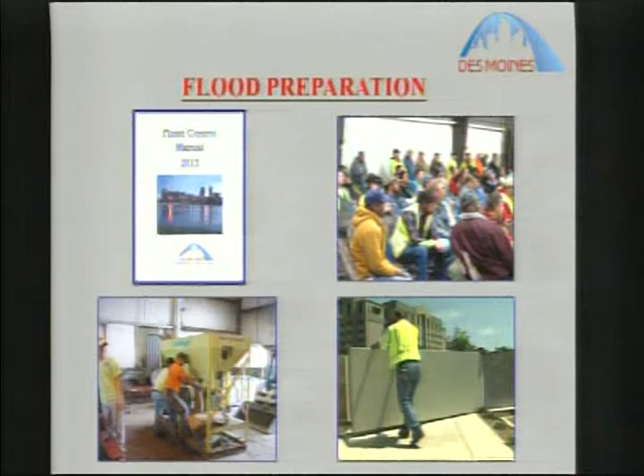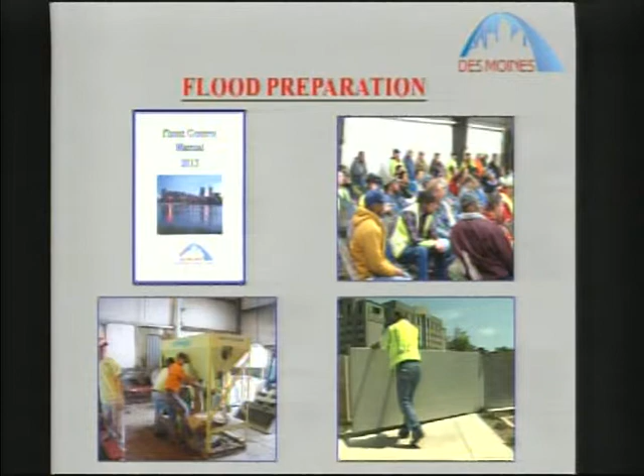In preparation for the flood season, we begin during the late winter months with preparing a 284-page flood manual. It tells us exactly how to button this city up step by step, inch by inch, in water levels on the rivers and streams. Then we meet with our employees, in the upper right-hand corner there, March 27th, to go over the details. In the bottom left-hand corner, we're preparing our supplies, filling sandbags, all the while exercising the facilities we have at swing gate there at City Hall.

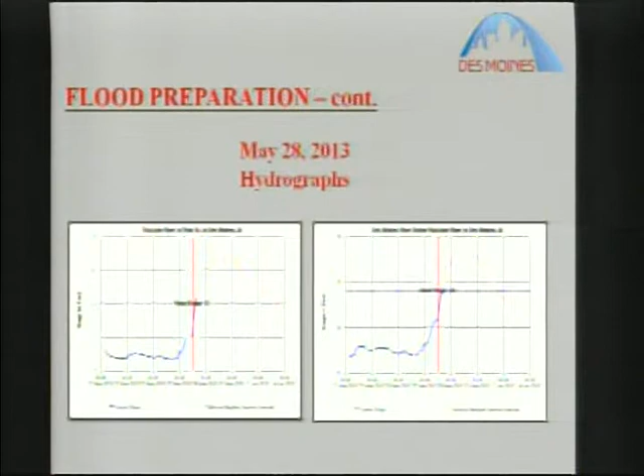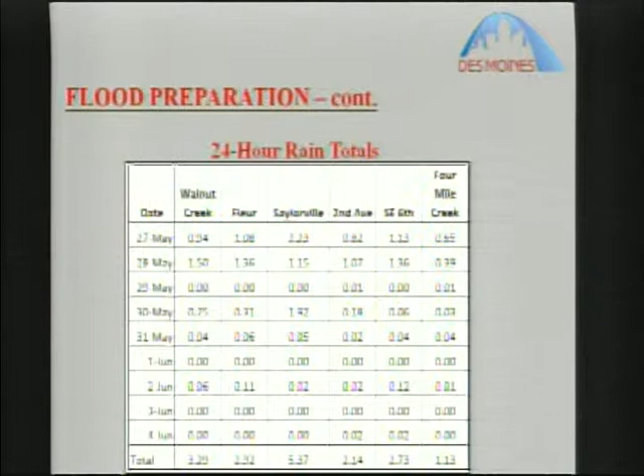This is what we faced on May 28th by hydrograph. Some of these you've already seen, but we have predictions far above flood stage on both the Raccoon and the Des Moines rivers. This is what we received for rain on us at these river gauges, and we also had it west of us in the Raccoon River Basin. Significant rain resulted in high water levels. This shows us well above flood stage on the predictions on Fleur, and at Southeast 6th we anticipated we may have to close Fleur at that time.

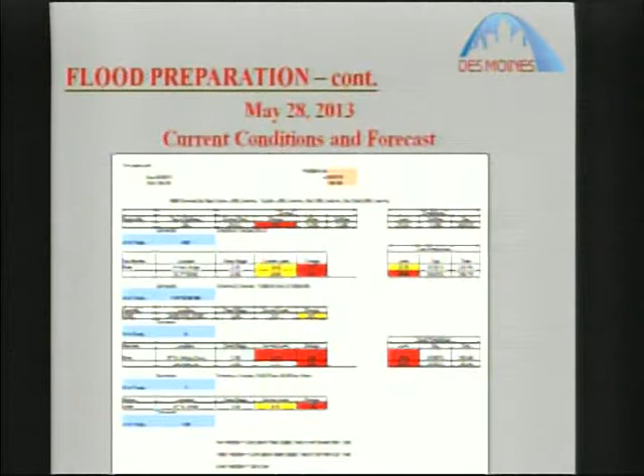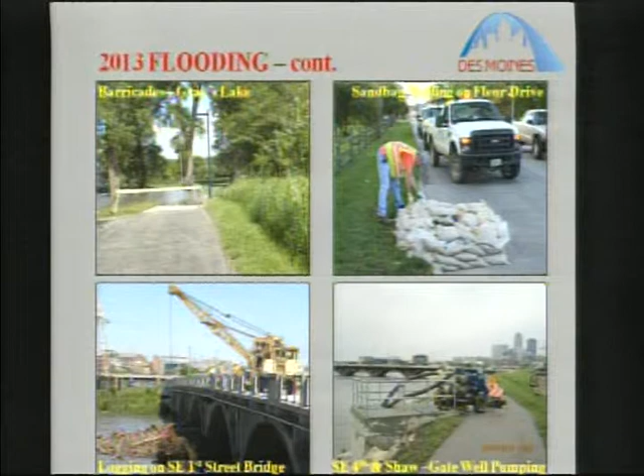These are some of the activities we engaged in to address the high water conditions: operational issues of barricading, sandbagging on Fleur Drive to give us another 6 inches if needed based on the forecast, logging operations to protect our facilities and facilitate flow, and pumping operations here at Southeast 4th and Shaw, the site of a permanent pump station now funded for construction.

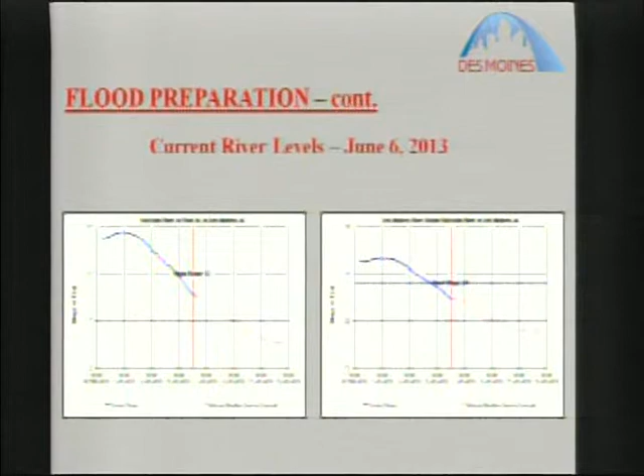The current river levels, current as of June 6th, show we're below flood stage throughout the city on both our rivers and streams, and we have Saylorville dropping at a satisfactory rate.

So at this point, in short, we got past that high water event, but this is interesting from our state climatologist: so far in 2013, Iowa has broken a slew of weather records with more rainfall than during the major flood years of '93 and 2008.

The forecast going forward, the best bet for the rest of the summer is more of the same, wetter than normal conditions. Looking at our 15-day forecast now, next weekend we're looking at heavy rain again, approaching an inch or over an inch. We're looking at about an inch and over on Saturday and over half an inch on Sunday. So we'll continue to monitor those conditions.

At this point, I'll be followed by our Sewer Enterprise Administrator, Dave Miller, who will bring you up to date on the flood protection facilities we have in place.

Morning, as Pat indicated, I'm Dave Miller, Sewer Enterprise Administrator for the City of Des Moines Public Works Department. I'm going to cover a couple of the projects we've been working on since 2008 and give you a quick update on their status.

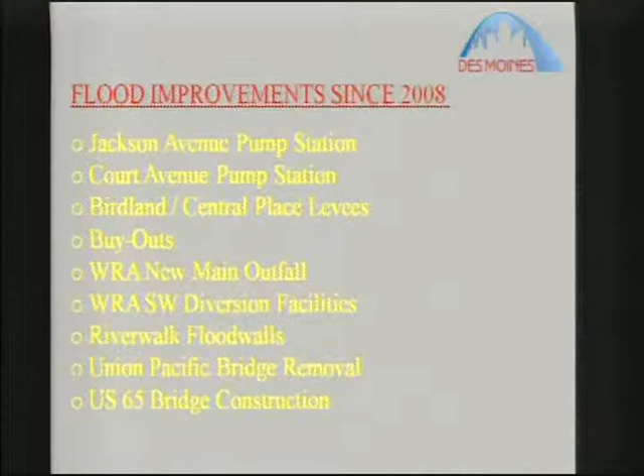This is a list of them. We built several pump stations, a couple of levees. We've done some buyout in some flood hazard areas on the east side of Des Moines. There are a few WRA projects, and we've had assistance from the Corps of Engineers on a project. The Union Pacific is paying to take out a bridge, and the DOT is doing some work.

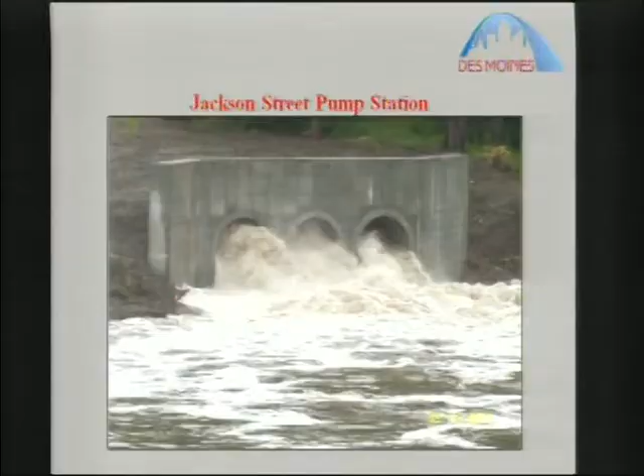This is a photo of the Jackson Street pump station discharge operating, taken from Southeast 14th. This was a $5.8 million project that's now in service, serving the south side of Des Moines from Watrous north to the river.

This really gives us a lot more protection, and it reduces the amount of personnel required to set. We used to set 3 Crisafulli pumps that were tractor driven, and we had to keep those gassed up and running, so this facility really assists us in fighting a flood.

This is a $13 million project total. $7 million was for the pump station, and the other 6 went into storm sewers that serve Court Avenue to 2nd Avenue, 2nd Avenue to Grand, and Grand to 3rd Street. We've seen a great reduction in flooding during heavy rains with that new storm sewer, and we have used the pump station.

Birdland Levee is a project that the Corps of Engineers assisted us with. They put in $5.2 million into this $7.8 million project. The city was able to get iJobs funds for $2.1 million, so our share ended up only being $500,000 for this facility. It includes recreation facilities on top of it.

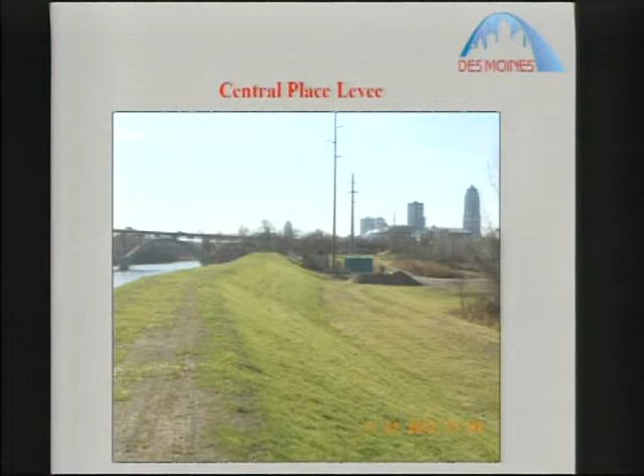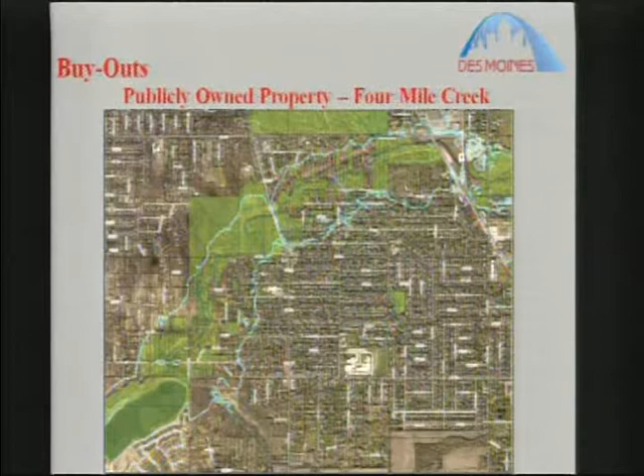Since 2008, we've bought 188 homes in this area. There are still 230 structures at risk, so we've got a long ways to go to get this corridor cleared. We've spent, I think, $12 million so far on those 188 homes.

This project is 3.5 miles long. It's a total of $88 million worth of work. 46 million of it is in the piping, and the other 42 million is in a facility at the treatment plant to pump and treat the combined sewer flows.

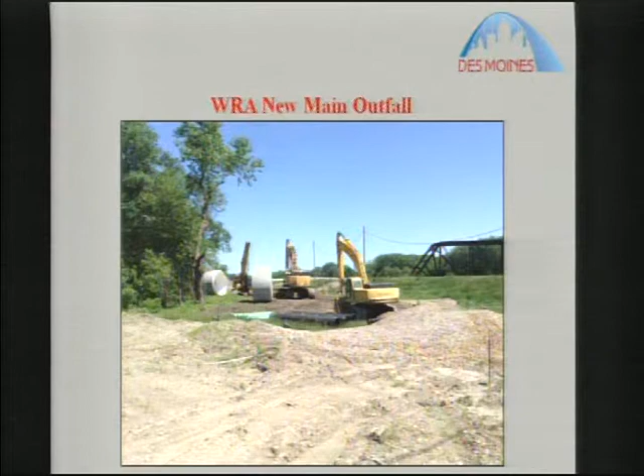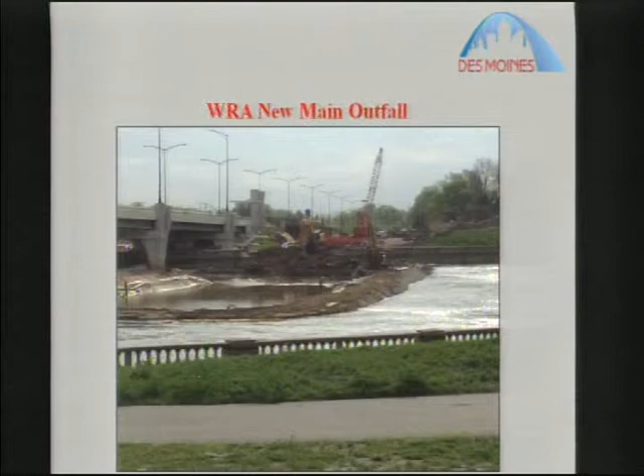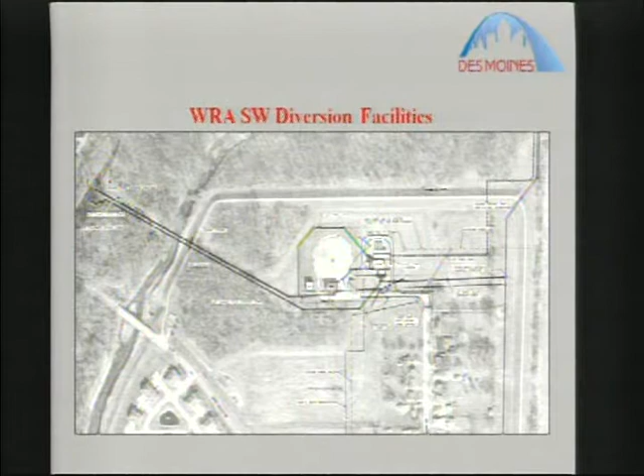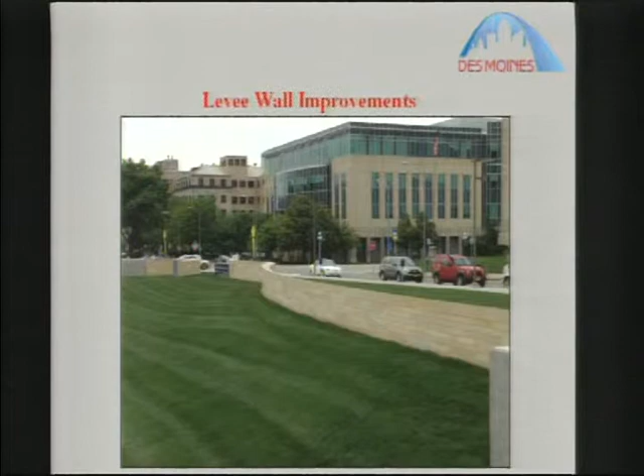The Corps of Engineers has been working on the levee wall system since 2008. This is a photo of the wall south of Court Avenue. In the background, you can see a gate structure. These are critical to our operating these levees efficiently. We can close that gate structure in half an hour and have that sealed up.

The Union Pacific has been taking out the bridge south of Scott Avenue. They have 4 sections out and there's 1 section left. Once they get the sections out, the piers will be taken out, so that will reduce the obstruction on the Des Moines River due to this bridge.

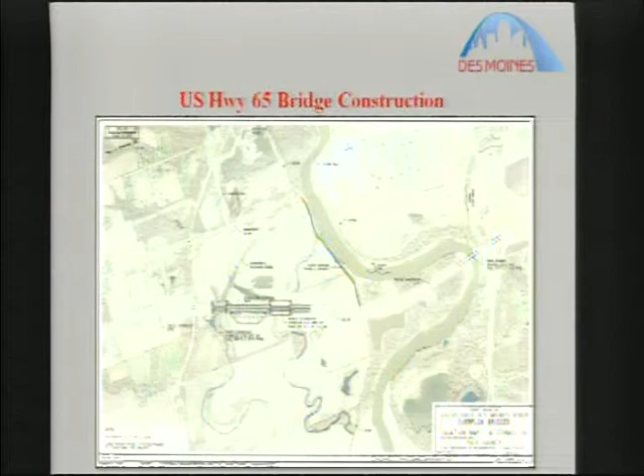The DOT has been working on building some new bridges across US Highway 65. It was built to an old flood standard from the early 90s, and new flow calculations have indicated there isn't enough open space in those bridges. So they're under construction with the first set of bridges. On the northbound lanes, they're building 2 sets of bridges, and next summer they will build the southbound bridges. The northbound bridges should be completed by fall.

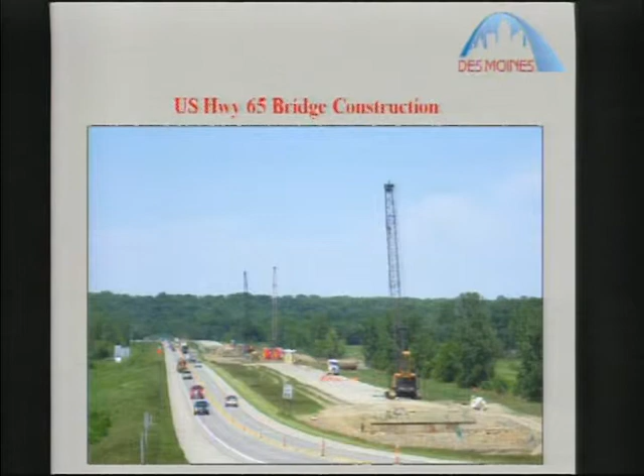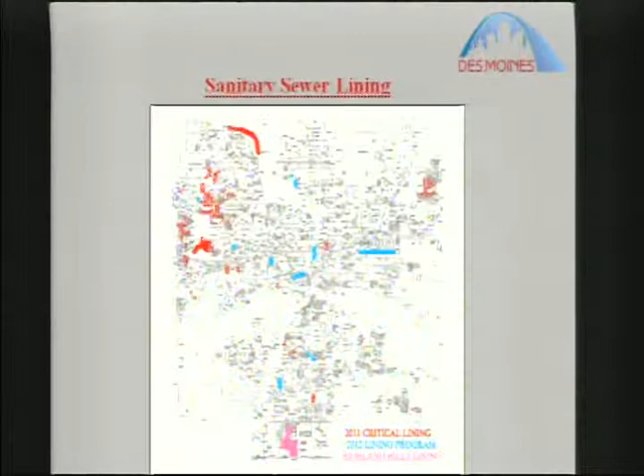Not only do we have issues in wet weather with storm sewers, we also have issues with the sanitary sewer conveyance system. We have 2 programs that we've been focusing on since 2008: one is the private property protection program, and the other is our sewer linings program. On the sewer lining program, we've pushed 3 major components of that.

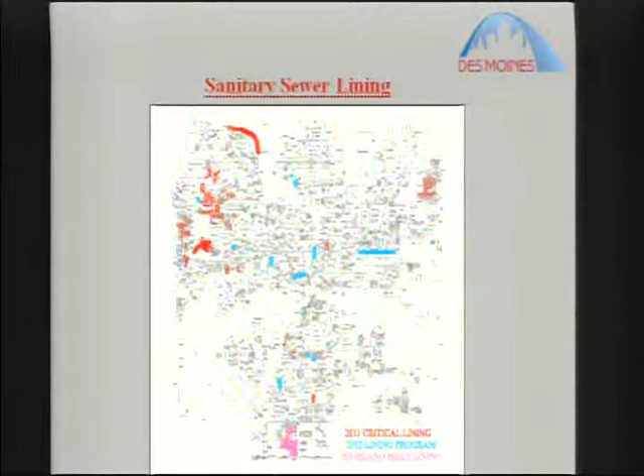We got federal grants to do lining in the Highland Hills area, shown at the very bottom of the map in a pink color. We got $3.5 million in grant from CDBG to do the red lines. And then with our own funds, we've been doing the ones in blue, such as East Grand Avenue and downtown on Walnut Street.

In the private property protection program, we've done almost 3,000 reimbursements to property owners to put in backwater valves or sump pumps. That's cost over $2.8 million. We've seen a great reduction in sewer backups due to this program. I think we can fairly directly attribute to this, because areas where we would have had backups in a wet year like this, we have not this year.

So that concludes my portion, and Jeb Brewer will be taking the next section.

Dave, could you go back - on the Winona project that goes to Norwalk, the southwest, can you give me more specifics about the timeline for that? There have been some issues, I know Pat's helped me deal with some of the issues down there with the water that's being pooled down there by the bales. The straw bales have been removed, and they've been spraying for mosquitoes to keep that from being an issue. Nick Carter with our WRA section has been working with the neighborhood leader on that.

So what's the timeline for this project being done then? It will be completed, we think, by August of 2014. So we've got 1 more spring to go. So will they go back and have to regrade and seed everything to get it to flow the way it's supposed to? Okay.

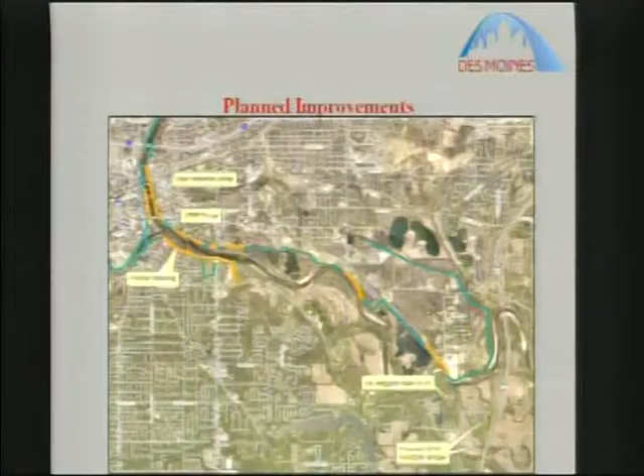The question before was about, once the DOT opens up those bridges, what's the impact to the surrounding farmlands? We've had some preliminary discussions with the Ag Drainage District 9 down there. To date, we really can't give them definitive answers about what property rights or interests would need to be obtained. Much of this property down there already has a U.S. Corps of Engineers flooding easement. This area does flood due to water backing up from Red Rock Dam.

However, we do need to make some additional improvements down there to complement the work the DOT is doing, to allow high water events to get over to those bypass flow bridges the DOT is building. That will have a significant impact on flood levels upstream from there. Again, we haven't designed that yet - we've had some preliminary discussions, and I'll get into a little more of the issues we've run into with the Corps regarding the work we want to do.

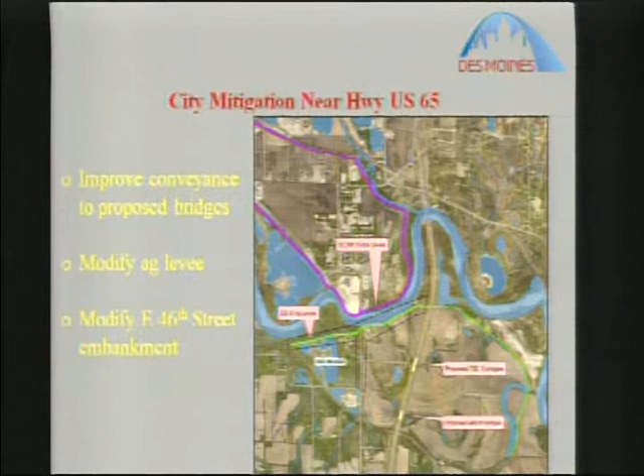This is just a review of some of the projects we had previously discussed.

As Dave mentioned, we have recently upgraded the flood wall system in downtown. The design and construction of those flood wall systems was built upon a previous set of flood flow frequencies. In our early analysis, we focused on improving the conveyance of the river system so we wouldn't have to touch the flood walls, since we'd identified areas where the freeboard didn't make the full 3 feet. However, as we've gotten into the analysis, it appears it's not going to be possible to make enough conveyance improvements to avoid touching the flood walls, which means we're going to have to put up some system of tip-up panels on top of those flood walls. That creates a whole other set of issues we need to deal with, and will impact planning for some other projects, which I'll get into in a few minutes.

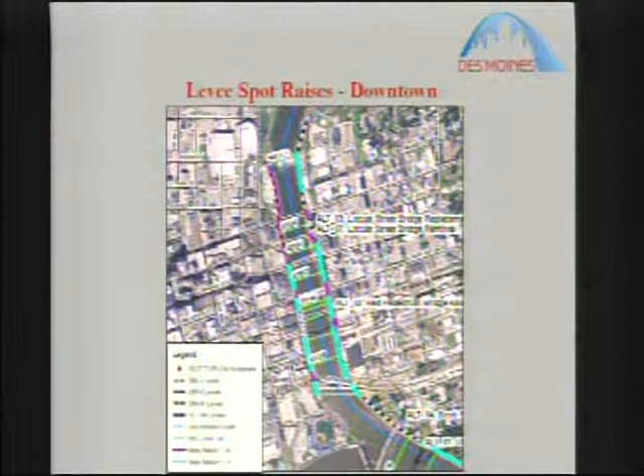Not only the downtown flood wall system, but we also have the earthen levees. We call these levee systems, shown on the map, DM1 and DM3. We had identified needs to do some minor levee raises on the earthen levees, and also to do some channel improvements to complement the UPR's work in taking out their railroad bridge, opening that up and improving the conveyance.

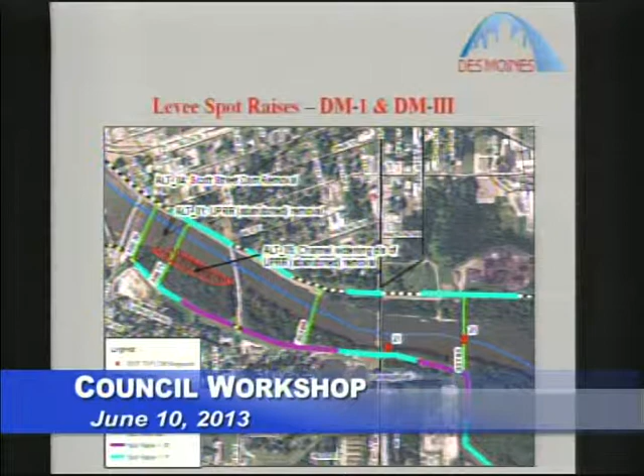We had worked with the Corps of Engineers on trying to make some improvements to DM3 under a minor 408 project, and that's what we'd been working on last year. Unfortunately, as we've gone through that process, the Corps has refined their process, and we're going to have to go through a major 408 review process, which is a significant impact to us on what we can do with our levee system, since even though they're owned and operated by the City of Des Moines, in order to do any work, we have to follow and comply with all Corps of Engineers regulations.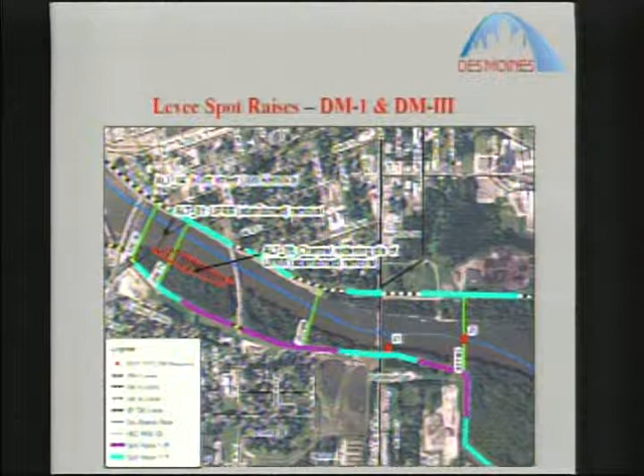As we move further down the stream, not all the levees that protect Des Moines are owned by the City of Des Moines. There is a levee in the southeast part of Des Moines called the Southeast Des Moines Levee, actually owned by the Corps of Engineers, built as part of the Red Rock remedial works. We've identified that there needs to be some additional levee raises there. One of the main issues is, since we don't own it, any work would have to go through not only a Corps approval process, but a Corps funding process. And as we've found out, that's very difficult to get through, because federal funds are becoming scarce, and also the length of time.

For example, we did make improvements to Birdland and Central Place through that Corps process. However, we started that after the '93 flood, and unfortunately, it wasn't in place until after the 2008 flood. It takes many, many years to go through that process, and that's going to be a challenge for us.

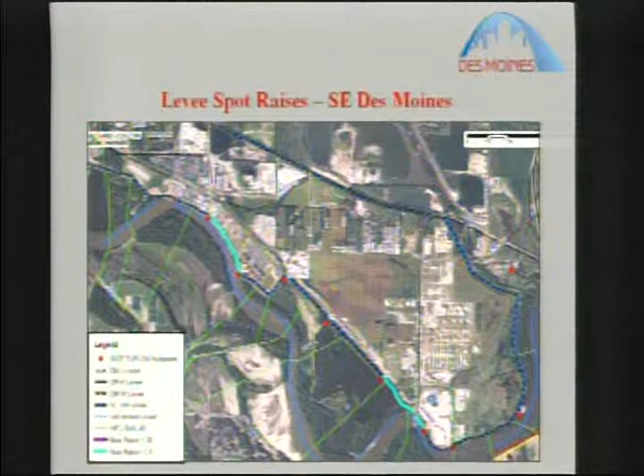We had done a feasibility study on raising what we call the Red Bridge, the Des Moines Union Railway Bridge. We completed that feasibility study and found out that it really was economically and technically feasible to raise the bridge up in height instead of removing the bridge for the flood constrictions.

But as I'd mentioned before, we were looking at conveyance improvements on the river and hoping not to touch the walls. Our analysis shows us that if we're going to have to put up tip-up panels on the walls, it may be more cost-effective to make those tip-up panels as high as we can with the structural integrity of the wall, which would be somewhere between about 1.5 and 2 feet of tip-up walls.

At that point, we may not need to raise the Red Bridge at this point, and we may be able to restore our freeboard requirements through these tip-up panels. So it'd be more cost-effective, in the whole reach, to invest our money in the tip-up panels and not in the Red Bridge at this time. That doesn't mean at some point in the future, if there are changes to our flood flow frequency, that we wouldn't have to address the bridge, but we've been looking at the global picture and seeing where we can get the most bang for our buck.

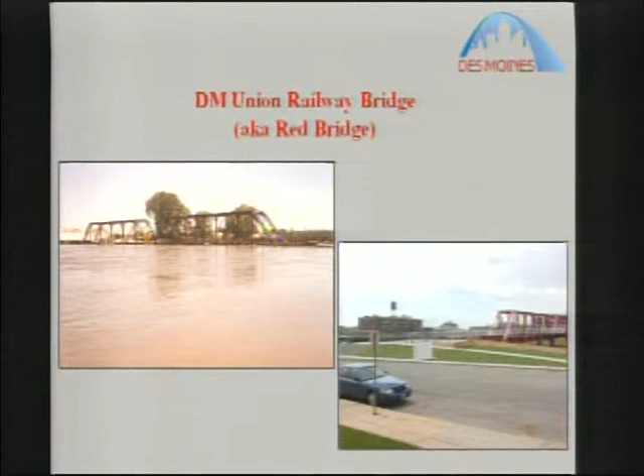That brings me to the point I wanted to spend the most time on, and there's some technical aspects. We throw this term around, 408, and it's really just a reference to the Corps of Engineers approval process before you can do any work to the levees. As I mentioned before, we had started, and our hope was to be able to do some of those earthen levee improvements through a minor 408 process, in which the requirements and analysis and all the things that you need to do are much less, and the time frame is less, the expense is less.

We started that process on the DM3 levee. We were unable to accomplish that, and as we had discussions with the Corps, we determined we needed to go back and do the major 408 process. The thing is, Rock Island District hasn't ever gone through a major 408 process. There are very few places that have done that. It's really a national issue.

In fact, there's a coalition of communities working to address this and make sure that while we need to look at the requirements to ensure improvements are done in a safe manner, there are not restrictions that unduly prevent us from making physical improvements to provide protection to the community. We've worked with our firm Holland and Knight. They've helped us make contact with this coalition, and even now there's some legislation which may help relieve some of those requirements for local communities regarding the 408.

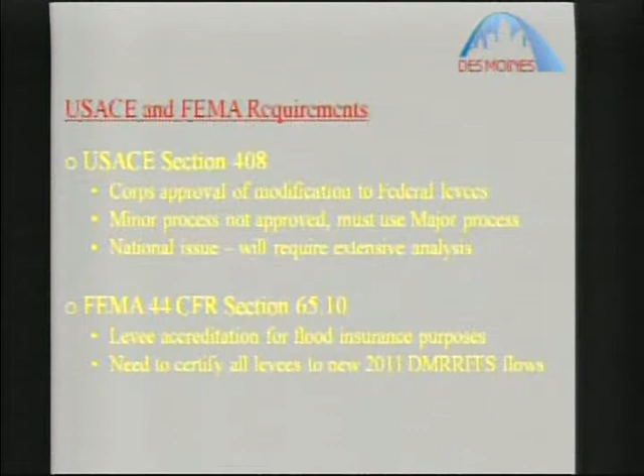You would think these programs would interface a little better than they do, but they're separate agencies with separate requirements. As we've been going through this process, we're actually trying to do an analysis that FEMA and the Corps are doing at a national level, looking at how these two separate processes interrelate, because you could go through a Section 408 process and at the end be 100% compliant with the Corps but not meet all the FEMA requirements. Likewise, you could meet all the FEMA requirements and not meet all the Corps requirements.

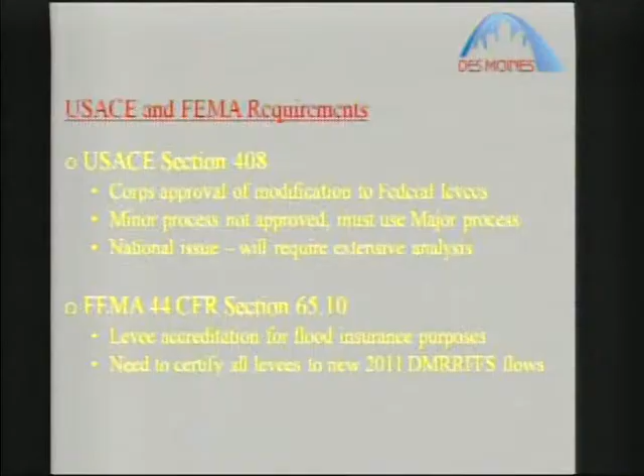So it comes upon us to look at our levee system and try to find out how to satisfy both of those requirements at the same time. We've already identified those deficiencies, but now we have to start the process of satisfying both agencies.

One of our major goals, obviously, is to provide additional flood protection to the community, but it's also to be eligible for accreditation through the FEMA process.

Now, the FEMA process and the flood insurance program is under review, and there are a lot of changes occurring right now in that process. We were originally scheduled to have new maps come out which would incorporate some of these changes to the river flow. In discussions with FEMA, even though their current dates are fiscal year 15 for preliminary maps and fiscal year 17 for regulatory maps, our conversations with them are that these dates will be pushed back.

A number of reasons for that. One is that they still are trying to determine what processes they're going to follow on a national level, and specifically how that would apply to Des Moines, but also their funding. The project essentially has to be restarted for us here in Des Moines for our mapping system. So we don't know when those dates are.

That's not necessarily a bad thing for us, because that gives us more time to try to get these improvements in place before the new maps come out.

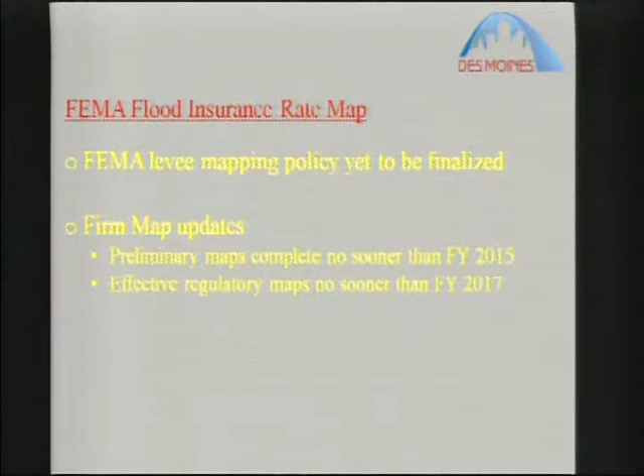They've been able to help us access administration functional experts, people who've worked in the Corps and FEMA. They've helped us get in contact with this national coalition. In fact, there's another meeting this week to discuss some of the 408 impacts. We've been focusing a lot previously on crediting language for work and the 408 issues with the Corps.

There's been some headway made. However, a lot of these processes take time, and we are continuing a process to try to comply with the current rules and regulations to get our projects moved forward, while at the same time seeing if there can be relief through a legislative process.

Want to review a little bit some of the contract work that's been done to date, and that kind of sets us up to talk about where we need to go in the future.

As I mentioned, we had started the DM3 levee. We did some preliminary design, did a submittal to the Corps of Engineers, and started that review process under a minor 408. We were not successful. However, in that we were able to learn a lot about the Corps, and the Corps was able to really formulate in their minds and communicate back to us what the requirements are going to be. It's difficult for them since they haven't gone through it before. You really don't like to be the one they learn on, but that's the role we'll be playing in this process.

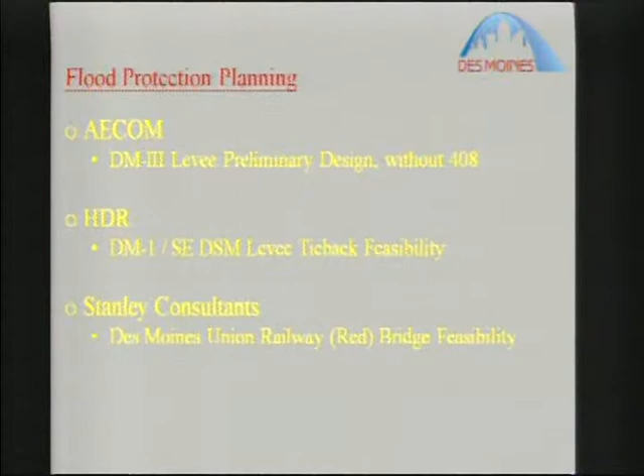The feasibility study really indicated that it would be so expensive for that tieback levee, you could probably take those funds and make the improvements on the Southeast Des Moines levee and get protection for that area. The tieback levee just simply separates the levees, so it really wasn't an economical option. Our strategy is to continue to work with the Corps and try to get them to do those improvements on the Southeast Des Moines levee.

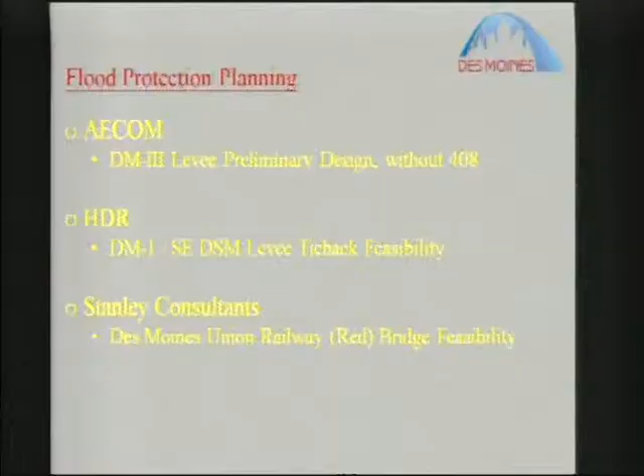In addition, mentioned the feasibility study for the Red Bridge, where we could raise it, but we may want to delay that project when we get to the end of our hydraulic master plan. That brings us to our main hydraulic consultant, Stantec, a national consultant who works with FEMA on these mapping issues, hydraulic studies, and accreditation.

We have already done the preliminary hydraulic analysis, and we've already gone through that minor 408. We've worked with the Corps and with FEMA to develop this set of compliance requirements. This 408 will require things like extensive geotech analysis, risk analysis, new seepage analysis - very intensive, man-hour intensive requirements that will be placed upon us.

Essentially, we have to go back, take what the Corps built decades ago in a conceptual world, take that apart, look at each part, and try to determine how to bring it up to current standards before we can even make any improvements to it.

We're going through that process. We don't know if there will be additional requirements placed upon us for facilities that are out there, tested, and have worked. We were kind of of the opinion that the levees have been there a long time, and we know they're effective because they've had to withstand a number of high water events. But the regulations will require us to go back and do this work before we can get approval to make any of our improvements on the levee system.

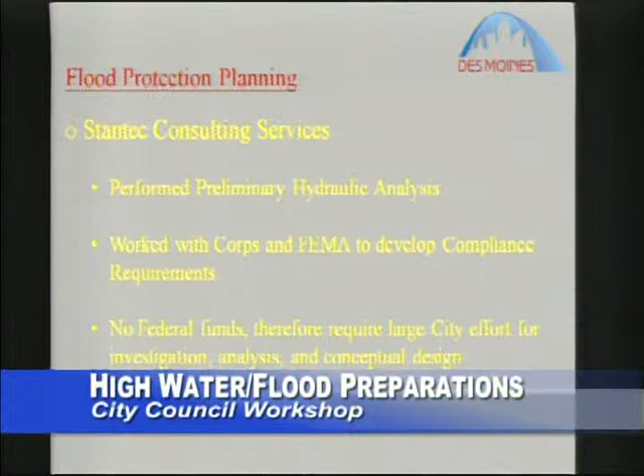Unfortunately, we're looking at the scope of services at about $1.5 million in order to do this - it's about our whole levee system. You have to go back and relook at what had been done decades ago. We would like to bring that back to council next month for your consideration, for us to move forward on that. If we don't do this work at this point, we can't do any improvements to our levee system without making this hurdle for the Corps of Engineers.

So that kind of leaves us at the end. We started with the good news, which is we've done a lot of work since 2008. Our system is really in very good shape. We were very effective even this last moderate high water event in fighting it. As Dave mentioned, a lot of the problems we'd have seen a few years ago in an event like this, like basement backups, have moderated, and we're even finishing some projects like the main fault sewer that will, in the next year or two, make even more improvements.

Even ones that don't seem as obvious. It always kind of astounds me that you do work over there in Winona and it helps flooding down in Hartford. This whole system is interrelated, and as you do work on one place, it has benefits in another area.

However, the bad news is the improvements that we want to make in the future, we are running into some additional regulatory hurdles that we are going to have to overcome in order to make the physical improvements which we think are necessary to restore that extra freeboard to the levee system. So with that, concludes our presentation.

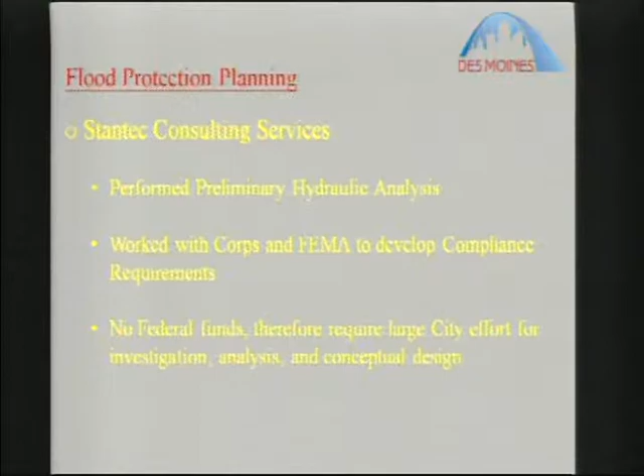So the regulatory hurdles, I know you've touched on some of them here, but is there anything that you haven't touched on? Is it all with the Corps of Engineers? Yeah, well, the Corps of Engineers is the first one you have to get through. The FEMA ones come at the end.

However, what we did is we did what we call a gap analysis - we don't want to go through the 408 and then at the end say, darn it, we didn't meet this one for FEMA. So we're taking the FEMA requirements and in our design analysis, bringing them forward, even though in the process of doing the project, it comes at the end.

But it's smarter to do all the analysis up front so that when you actually do a project, you don't spend millions of dollars and get to the end and find out it won't meet accreditation. That gets difficult because the rules are constantly changing. On Monday, this is what we're going to do, and you get the work done by Friday, but Wednesday they change the rules. So there will need to be flexibility as we go through this process, and constant monitoring and feedback through the FEMA system. I think we've got that in place since Stantec is a FEMA consultant - they're really tied in with the rules and the rule processes as they change.

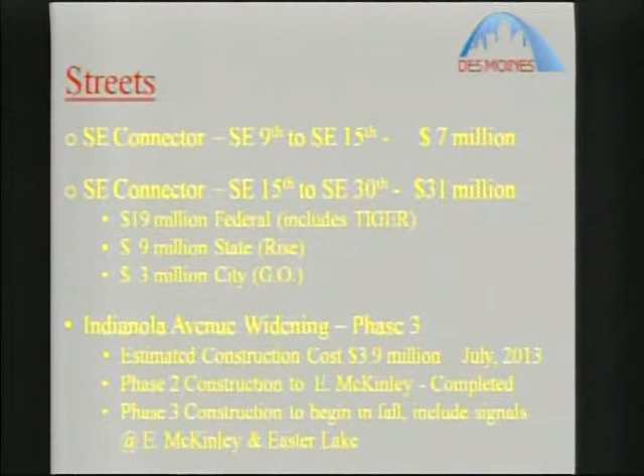Of that $31 million, $19 million are from federal grants, which includes a Tiger grant, a nationally competitive grant. It was very difficult to get, and I think we were successful because of the work the mayor and other council members did in Washington, D.C. to secure those funds.

We also have $9 million of state RISE funds. Those funds were also there because of the work with Kemin and some of the improvements being made in conjunction with that construction. And then finally, $3 million of city funds.

It is very unusual for a project of this size to have such a small amount of city funds. We're very fortunate. It's very unusual.

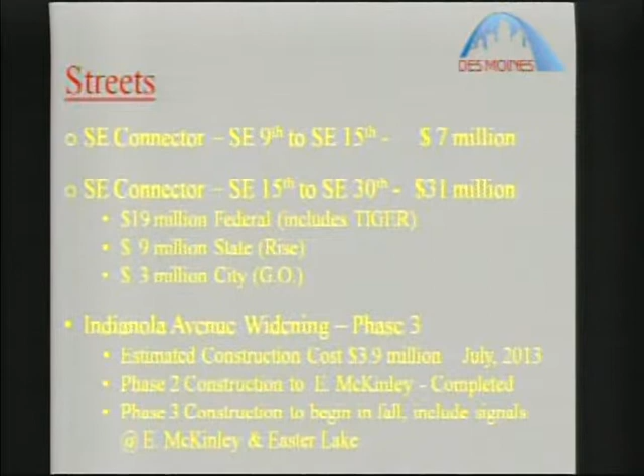This will be a huge project, and because of the Tiger funds, it's going to have a lot of grant compliance. Tiger just takes grant compliance administration up a notch, but we are preparing to comply with those grants. One of the things you have on tonight also is the construction administration services, necessary for us to access those grants. We have to make sure that we comply with those requirements.

Indianola Avenue widening is on tonight for setting the date hearing. I know that's a special interest to Councilman Meyer. This particular piece of Indianola does include the signals at Easter Lake. I know he's been asking about that for many years, and this is the project which will install those.

That project does have about $3 million of STP funds on it. The construction won't be starting on the main road until next year. There will be some sewer and other work done later this summer in preparation for the disruptive work which will happen next year.

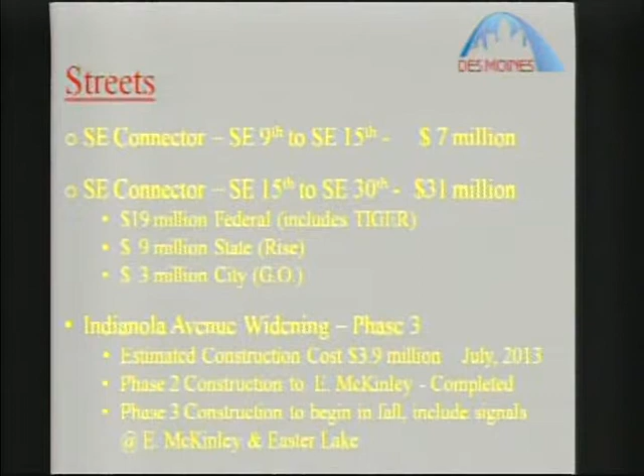We typically have expanded street resurfacing program contracts 1 and 2. The first contract is on tonight's agenda, typically about $2 million. Council's been successful in obtaining gaming funds, funded through the gaming fund program. There's also projects for HMA pavement scarification and resurfacing, where contractors and our city crews work hand in hand to resurface city streets. The list of all those streets is contained in the yellow handout you have.

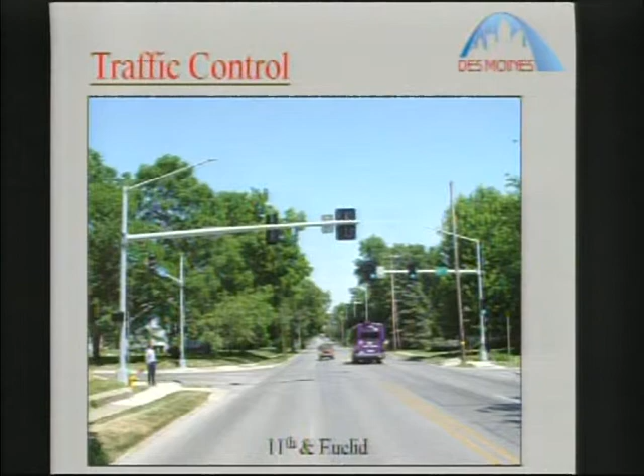I'll go through some of these quickly. There's a recently completed 11th and Euclid signal project, which I know Councilman Mahaffey's familiar with. There will be coming up to bid later this summer, a project on Euclid Avenue at Cornell and Oxford for about $1.3 million. It's primarily a traffic safety project, but there will be some elements of the Highland streetscape built in as well, such as sidewalk and lighting, so that when the streetscape project goes, we won't have to redo things.

Another safety improvement project is at 7th and Laurel. That will help address some of the traffic and pedestrian issues associated with DMAC and Mercy. The bids for this will actually open tomorrow, and then the contract will be presented to council at the next council meeting.

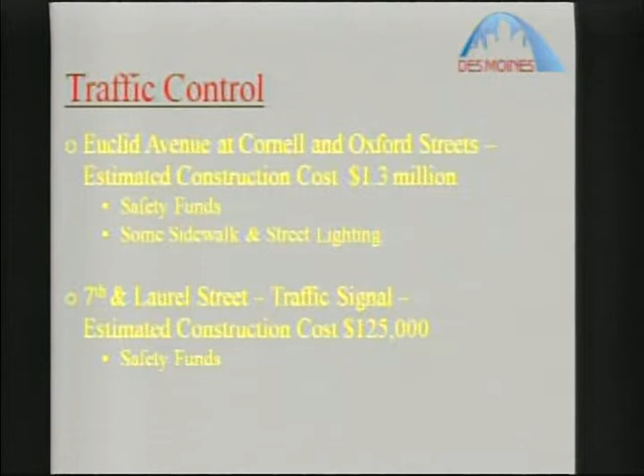We have East 14th and East Euclid Avenue improvements. This has safety funds in it. It's a project where we have a number of accidents where people run into that signal pole, and we want to move it back so our pole doesn't get damaged, and also so people aren't injured or have personal property damage from running into that pole.

Beaver Avenue, Aurora Avenue - this is really a project that was done in conjunction with the Beaver Avenue widening project. It's about 75% complete and will be finished up this summer.

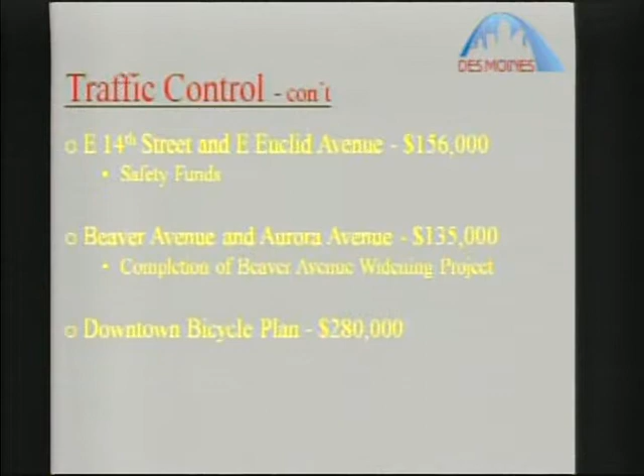Then a project that's going to be in front of council tonight for consideration, our downtown bicycle plan project. That's the DOT process, bid process, but it'll be for council's consideration of award. I know there's been some questions about how much of that project can be done before RAGBRAI. Only a portion of it can be done. We are unable to talk to the contractor yet due to DOT rules. We have to wait until your action tonight, in which case we can talk to them about scheduling and how much we can or cannot get done before RAGBRAI.

Bridges, which is where we kind of started our presentation.

On our bridge projects, it's really a continuum. We are constantly going through inspections and then programming, and typically we're working on 1 or 2 major bridges every year. Since the city of Des Moines is built on 2 rivers, we have a number of bridges. It's a large part of our capital program, and we have to keep focused on it because you really cannot get behind on your bridge maintenance improvement program.

Grand Avenue over Walnut Creek, Councilmember Hensley mentioned. This particular $3.3 million project was started this spring. It is a complete tear out and rebuild of the bridge.

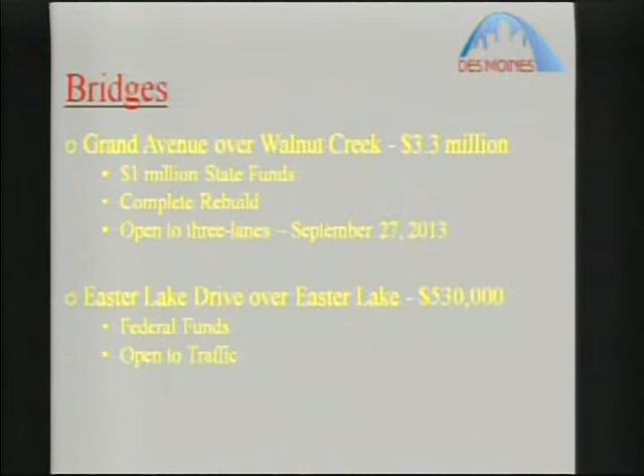We have been working very closely on the detours. The police department has been great on the enforcement actions. We've been out there writing tickets to those individuals who feel that the speed limit's just advisory. I think that's been effective. We've been measuring the speeds, and the speeds have been staying down. We don't see the speeding through that area. So our enforcement and education programs have been effective.

It is very disruptive to the local citizens, even though traffic's trying to find other routes. There are some non-official detours which we want to try to discourage. And tonight there is a change order in front of council.

Earlier this year on that project, there was some asbestos found in some caulking underneath a railing, which was quite a surprise to us. I guess years ago people were concerned about a concrete bridge burning down over water, but I don't know why it was in there. We did deal with it in accordance with the appropriate regulations.

That has been removed. In addition, there was some waterproofing on some of the concrete inside the arch, which we found will require some of the concrete rubble to be disposed of in a landfill. It's not really a hazard, but we do need to dispose of it in a landfill versus a construction landfill, so that's some additional costs associated with that.

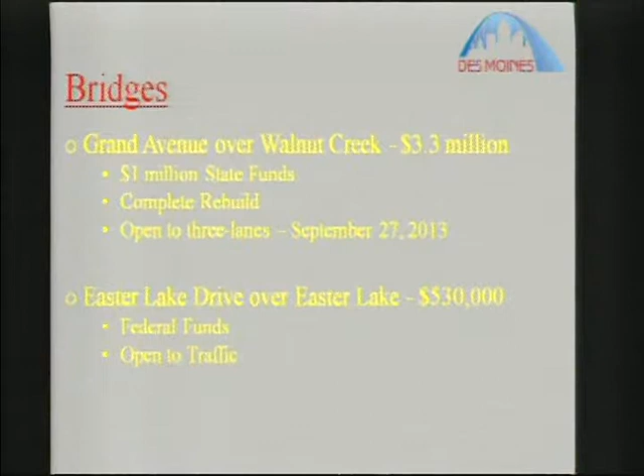I think the important thing is that the opening date had to be extended to September 27th, and that's probably the biggest action in front of council on that change order, reestablishing that date to account for those environmental and regulatory issues that were not in the original contract. I think it's important for us to get that date established now so that when we get closer to it, we can keep everyone focused on the goal, which is to get this bridge open.

What was the date? It was like 2 weeks before that, or 10 days, so. Now, Jeb, you and I have talked about this. The businesses down there, there are a couple of businesses that are being impacted tremendously. Their sales, you know, they shared some numbers with me, what they were a year ago compared to what they are today, and it's half.

Especially if it's not a destination business. McDonald's is a prime example, because you can go to McDonald's any place else in the city and get the very same product. But it is really having very, very significant impacts on businesses like I never imagined.

Right, that's sort of the bad news story. And then on the good news, some of the businesses which tend to be destination businesses, people are finding them. It's like when you go to McDonald's, unfortunately, if you went to one McDonald's, you're just as satisfied as going to another, since that's sort of their business plan, uniformity across all their restaurants. And so the drive-by traffic is very important to those business types.

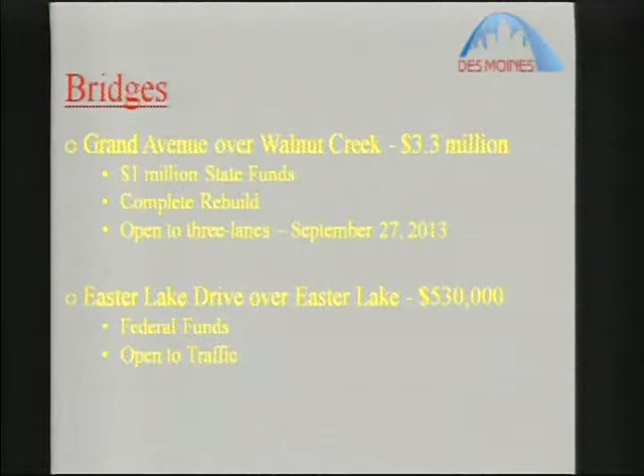Maybe a little better news, the Easter Lake Drive over Easter Lake project started this year and is open to traffic. It wasn't a complete rebuild, which helped us. There's still additional work to be done. That bridge work was staged in between the work on Indianola, so it's to be completed this year, and next year we'll have parts of Indianola Drive down, which works in with the local traffic.

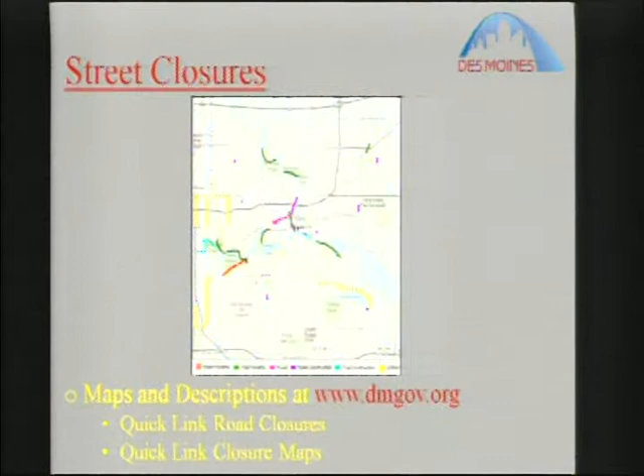Just a little commercial break here: we do have on the website a road closure, street closure map. You can get to that at dmgov.org. If you look on the left-hand side, there's a quick link that says road closures - click on that and they'll have a list of road closures. Also on the right-hand side, you can do closure maps, and if you click on that, a map will come up showing closures throughout the city.

Our 2013 program hasn't come out yet. What's important to notice is that in the previous two programs, we were able to get grant money. That won't be available for the 2013 program, but we will be doing one with our enterprise funds.

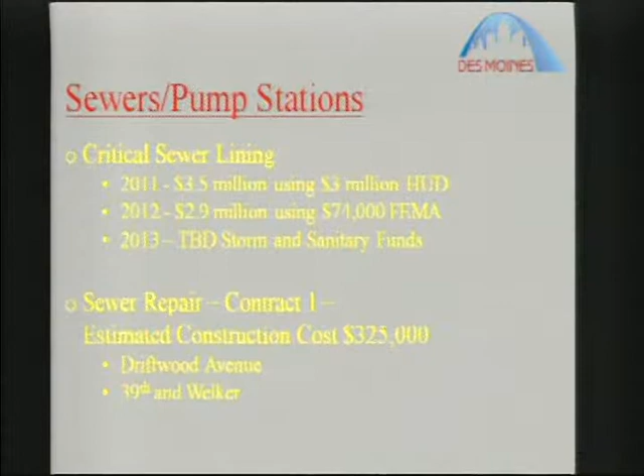We typically have a number of sewer repair contracts out in the city. Currently, contract 1 is being worked on. There's one contract which may be of interest to Councilman Myers at the Driftwood Avenue area, in Three Lakes Estates. It's a sewer that was damaged by a landslide a few years ago, and we're going in there to repair that and reroute the storm sewer.

As far as types of contracts, we are installing new sanitary sewer. There are places in town which don't have sanitary sewer when they came into the city of Des Moines - there's one on Wakonda Parkway. These projects come in as petitions from the neighbors. It's nearing completion. Another one just starting is at East 37th and Hubbell, which should be bid here shortly in July. Pump station work was mentioned in the previous presentation, Southeast 4th and Shaw.

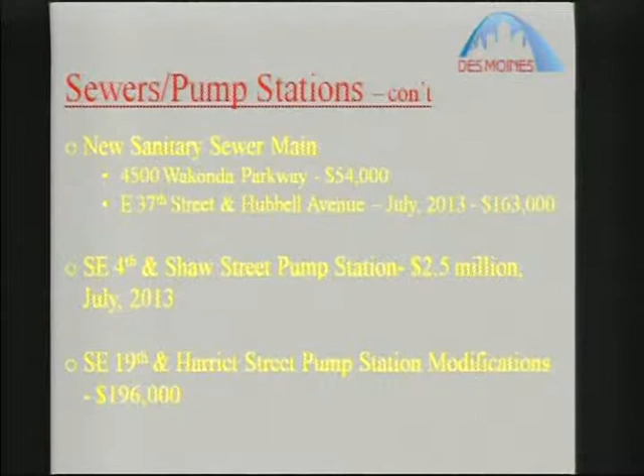Currently that requires crews to do pumping. We have programmed to install another pump station - it's just a continuum of our process of improving flood protection. Not only new pump stations, but there's a current contract out for pump station modifications at Southeast 19th and Harriet, to make those current pump stations maintainable and more robust in their operation.

Cheatham Park basketball courts - there's a project, Greenwood, on tonight's agenda for council consideration to award, to repair some of the detention ponds and help that pond have better water quality in Greenwood Park pond. That's on tonight's agenda.

Just a record of note, last year we did quite a bit of trail work: Des Moines Regional Trail, John Pat Dorrian, and Grays Lake Connector Trail. That represents about $2 million across those 3 projects of new trail work. Not only do we have new projects in the park system, but we need to go back to operation and maintenance.

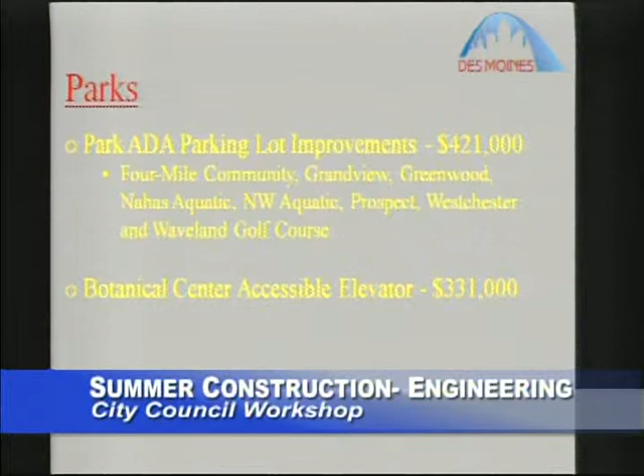Tonight's consideration for award is a contract for Park ADA parking lot improvements. As you remember, Project Civic Access identified a number of improvements the city needed to do to improve ADA access - this is part of that project. In addition, a project was awarded for the Botanical Center accessible elevator. That project was part of a previous agreement, and work is underway. A lot of the work you see happening down at the Botanical Center is not city work - it's privately funded - but we do have this one little piece down there, just to make you aware of that.

Kind of speeding up on sidewalks. I think what's instructive here is that while we still continue to have our traditional sidewalk construction programs, due to Project Civic Access, we've had a significant increase in what's required for us to do on a ramp project.

Across 3 programs, we've got about $1.2 million. Those were on the fiscal year, which we're about ready to run out. As soon as we enter into the new fiscal year, we'll be bringing additional ramp projects forward of about similar scope in order to be compliant with that program.

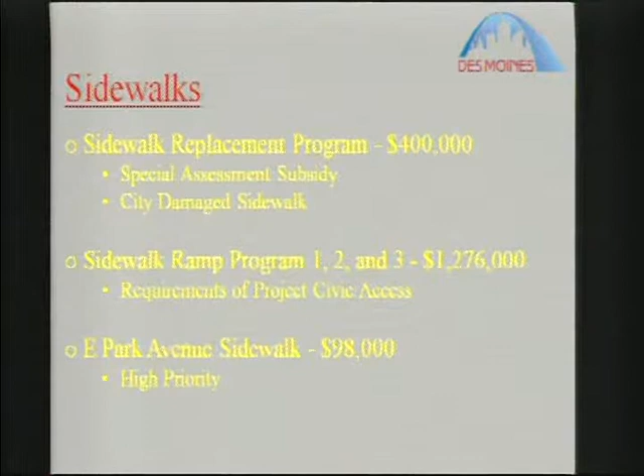We do also have high priority sidewalk. Those are non-assessed. We do have assessed programs which vary year to year depending on the petitions from the citizens, and there will be another high priority program again once we enter into our new fiscal year and funds are made available.

Those facilities, there were also private funds available, grant funds that helped us construct those. We do have our general maintenance program awarded this summer. Parking garage repair at 3rd and Court, 9th and Locust is essentially maintenance type work. These type of projects are funded out of the parking enterprise system.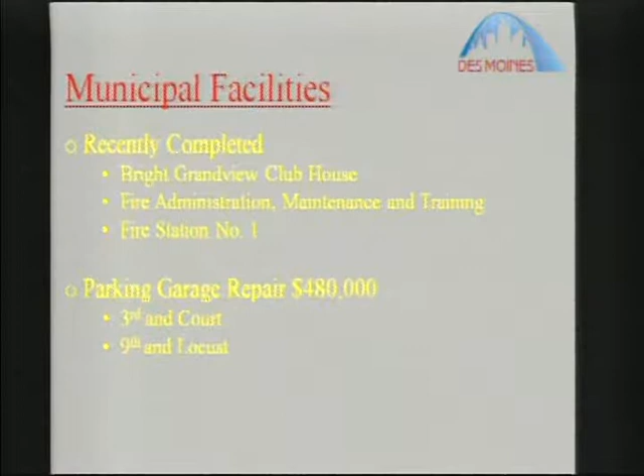Police evidence, the bids will be opened tomorrow on the police evidence storage facility, and the results of that bid opening will be presented to council at their June 24th council meeting for your consideration.

Just some general municipal improvements later this year, some HVAC improvements in the library system, and of course, the biggest project, municipal facility project this summer will be the MSC, which has already been awarded by City Council to Neumann Brothers, a firm here from Des Moines.

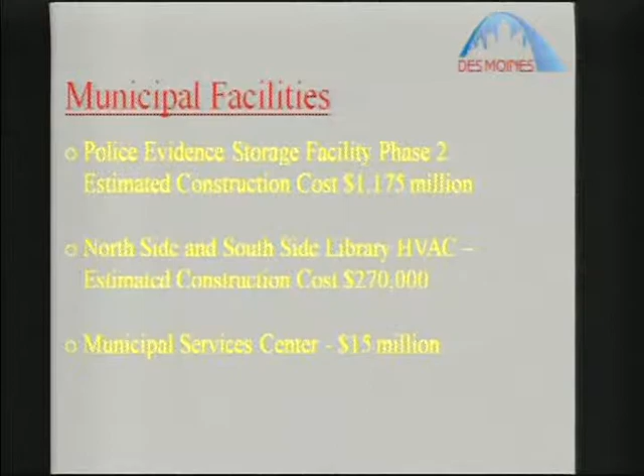So that sort of concludes a brief overview. Again, you do have the 2 documents. If there's additional information about any particular project, or if you want a different one included in that handout, let us know. We can update the next time we publish that.

Yep, thank you very much. A lot going on. Thank you.

Let's quickly move to our next presentation with Parks and Recreation with an overview of the summer programs, construction, and park improvements. And we'll be brief, let's make it as quick as possible.

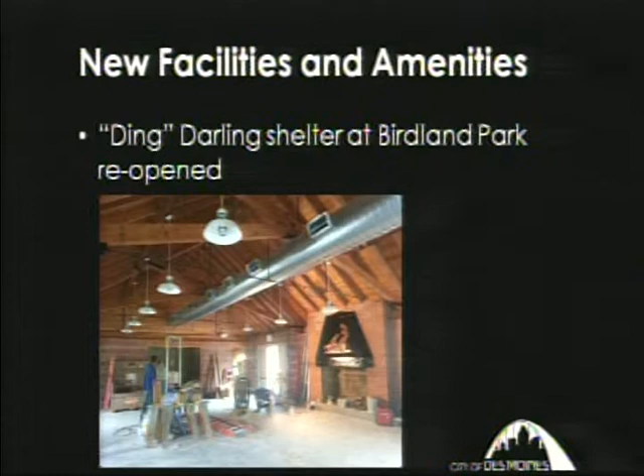Also mentioned in Jeb's report is Good Park. This picture was taken last week. This is the new shelter in the background, and it'll be a splash pad like you saw in the previous slides.

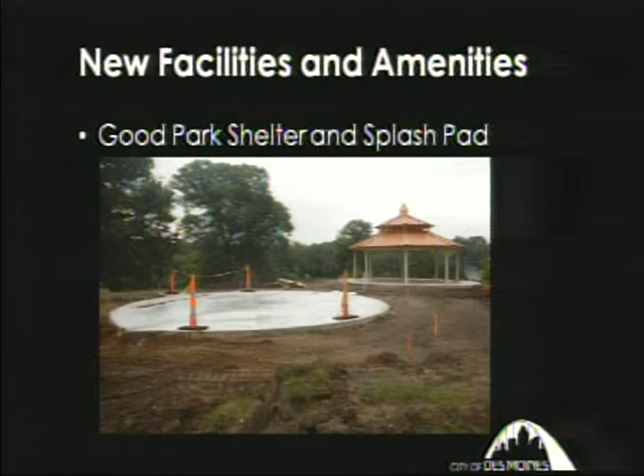And the new Des Moines River Trail that goes from James Cownie Youth Baseball Complex down to Principal Park. This wonderful facility should come online officially later in July, is what the engineers tell us. So we'll have a nice event for that.

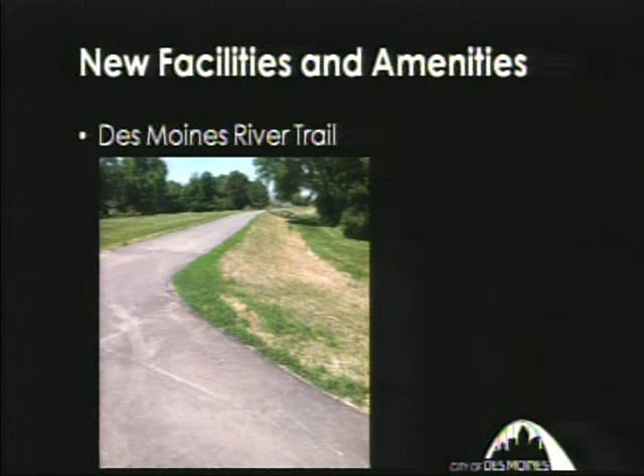Just quickly, we have a new shelter being built at McHenry on the Overlook Terrace where the tennis court used to be. We have 2 miles of nature trails. Something important for the council to know: we continually survey the public about capital improvements in the parks, and their number 1 and number 2 things they always rate are paved trails and nature trails. Also, Memorial Dog Park will come online the week of June 17th.

And we had a great dedication yesterday. I know this is past data, but I think it's great for us to point out that we had a nice Woodland Cemetery Arts dedication. We honored Gerald LeBlanc on Saturday, and we had a great attendance from the council. Thank you for coming out. I know he was very excited, and it was great for us to do. He's done so much for our cemeteries, and we can honestly say that without Gerald's work, our cemeteries wouldn't be as beautiful as they are today.

Also, we're going to have some more dedications, as you see here, for the new shelter at Birdland and the Easy Launch Canoe Access at Grays Lake and these other facilities. We'll be getting with you on your calendars to hopefully get you out to those too. That was rather quick. Very good.